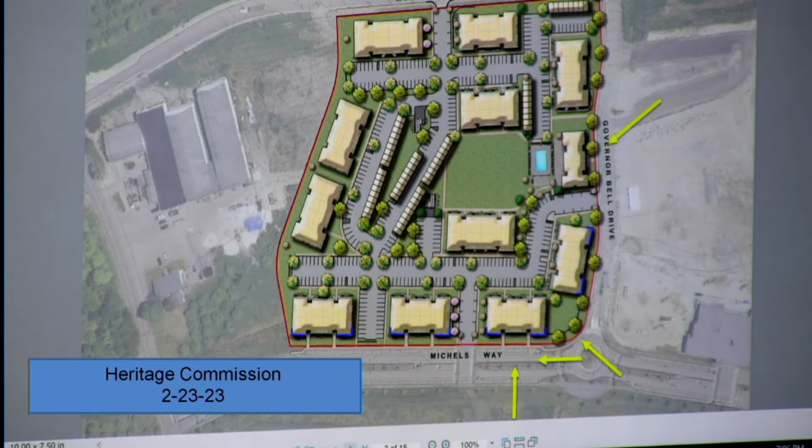So here, just to jog everyone's memory, these were the initial renderings and kind of the massing that we did. We've stuck with the same massing. We've broken it up by providing some color and different materials that we hope you'll enjoy, but just so you can get a glimpse of where we started as we get to where we are today.

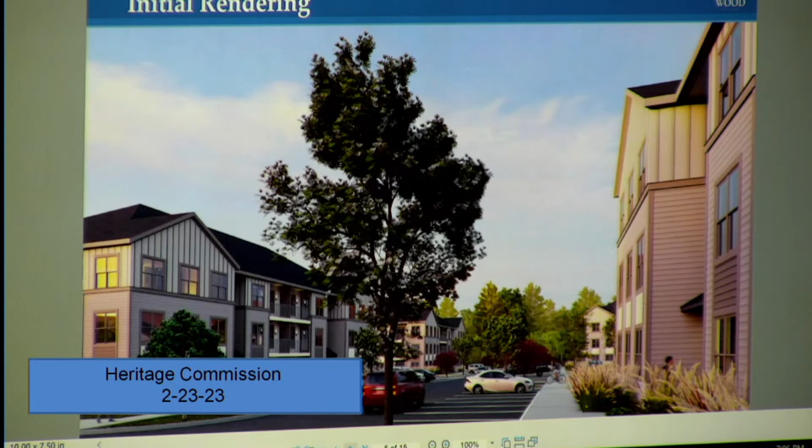I'm going to have Rob, the architect, but one thing I did want to point out is, at the request of the board, previously we did not have connections from the building to Michels Way here. Access was provided on the rear side of the building, on the parking lot side, and we have now added connections to Michels Way. But as was noted, there is a pretty significant grade there, and so stairs are required.

So the scheme you're looking at right now, we did two schemes: one that features stone, which you see here, and one that features brick, which we'll show you in just a second. The most prominent parts of the building are what we chose to clad in the nicer material, the stone.

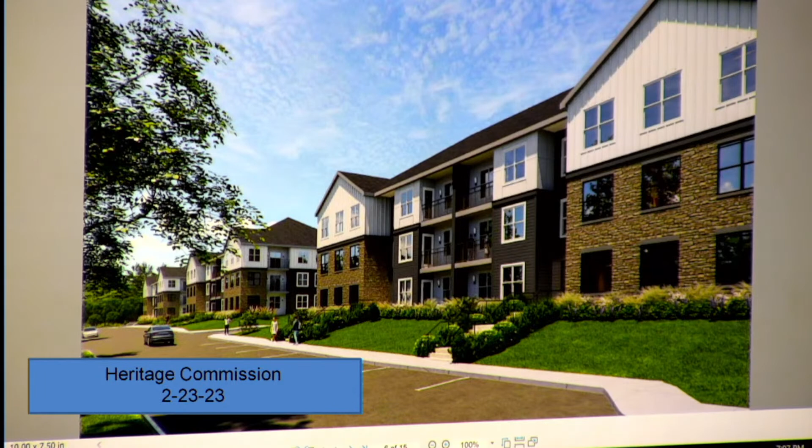Those are what we call the end caps of the building, the far right and far left in this view. Down Michels Way we have 3 buildings, so that's basically 6 of the stone end caps that you see here.

As Mark said, we not only have the staircases, but those staircases lead up to an actual entrance to the building. Before, there were no staircases, no real connection to the public way, and no access point from the exterior to the interior of the buildings - that was common space. Now the steps go up about 6.5 feet, flanked with some landscaping and vegetation, leading directly to entrances to the building.

This view is taken with stone cladding the end caps up to the 3rd floor level, with clapboard and board-and-batten siding in between. Over the lintels of the windows within the stone, we'll have a cast stone concrete lintel as well as a sill below those windows.

Here you can start to see the massiveness and richness of the stone pictured pretty well, returning into the volume of the building. That really goes a long way to make these 3 buildings feel special. You'll see when we look at the site plan how we've actually taken some of that stone and put it on the clubhouse building as well.

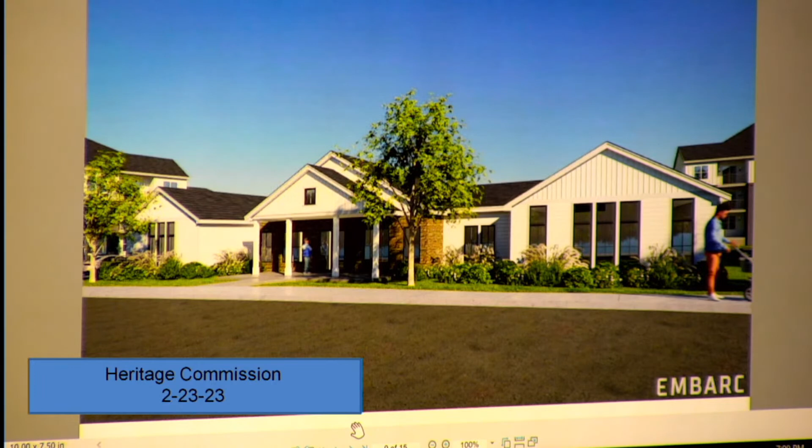Next slide, please. This is the clubhouse building, the other view we talked about. Here we're going to feature the stone or brick surrounding the main entrance, flanking it left and right, or some of the amenity spaces, be they fitness centers, community rooms, or other meeting type spaces.

So those are the studies that we did. We think it made a big difference, not only studying whether it be brick or stone, but also studying the colors of the clapboard, the panel, the fiber cement panels, and so forth. In this view, the building on the right-hand side is another building that would also be clad in brick and/or stone, heading up towards the community building. So it's really 4 buildings that we've chosen to clad - the ones facing the slightly more public side of things.

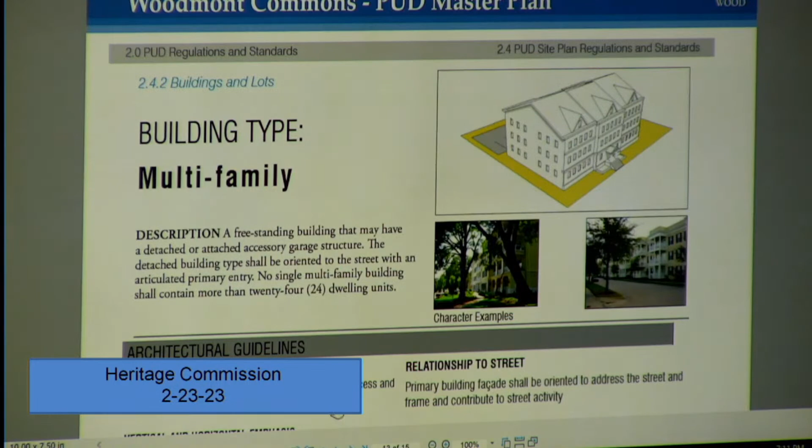So yeah, that's kind of it. We put in a couple slides with the guidelines from both the master plan as well as the Londonderry lookbook. We thought it was prevalent to show these images, and that's where we initially got our design ideas and renderings from the lookbook and the PUD master plan.

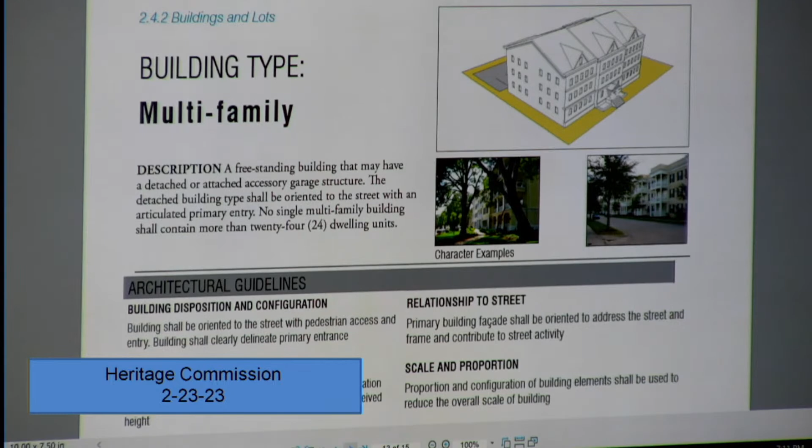So that's kind of the updates we've made. Most of it has been to the materials. The one site change was adding those access ways on Michels Way. We'd love to hear your reactions to the changes we made. We think we've come a long way, and visually now, as you drive down Michels Way and enter the site, whether through Governor Bell or Michels Way, it's something the town can be really proud of and looks really appealing.

Or even the site plan, either one. Stone or brick? We like the stones, probably a stone one, but love to hear the board's thoughts.

I think I personally would tend to agree with you on the stone. With the design, the way the building is, the stone looks a little better to me. But I'll open it up to commissioners to make comments, ask questions. I like the stone also. It seems a little classier. It does seem a little classier, yeah. And it has a little difference from the Dairy Medical Building.

Yeah, and that's kind of what we thought too, right? That's commercial, right? And how can we differentiate residential from commercial in a different block, a different zone, and that's why we kind of thought the stone differentiated its own thing, but yet there is a blending. So look at the brick - the brick just kind of hit me in the eyes, and it's too strong compared to the wooden part, where the stone seems to have more compatibility with the wood.

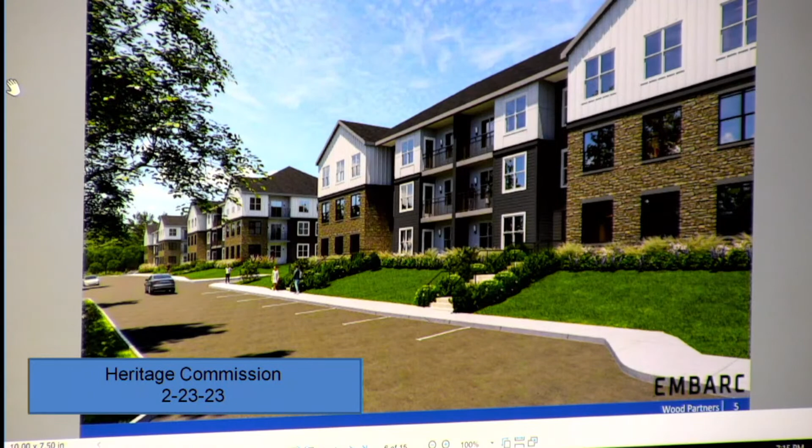Yeah, and upscale. The only thing that I would note, and I'm sure it'll probably come up in the planning board - I could be wrong - is that the faces on Governor Drive, Governor Bell, and Woodmont Ave, those buildings, those faces, I think should carry up and around. The one that's close to the packing center, the packing building, there is no road there. I don't know if there's gonna be a future road there or what transpires with that. But based on what I see here, that would be only my recommendation - face the other ones on Woodmont Ave and Governor Bell.

And I think we've made some really good strides. Yeah, because I think the plans anyway are rough plans for the old storage building, for like a community center or performing arts thing. Who knows? I guess they wanted to keep that building anyway. So of course around there you'd have to probably have parking.

So that would be 4 additional faced buildings. Yeah, that's my recommendation.

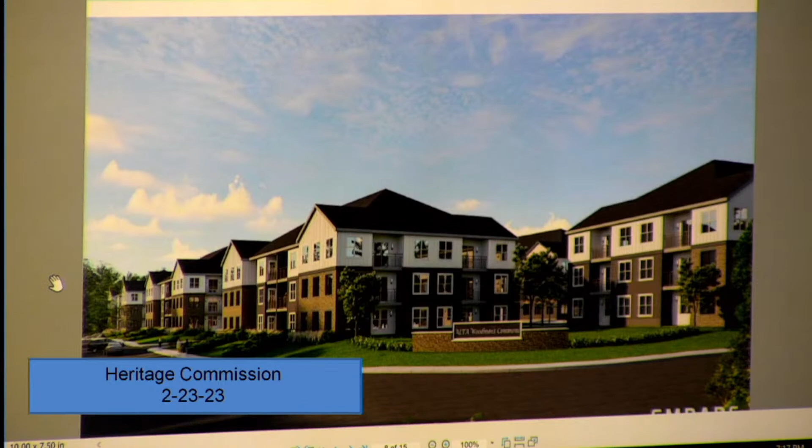Yeah, I would agree. When you look at the master plan here, they have all the parking inside the way we envisioned it. And like I said, if they dress up the other buildings that face Woodmont Ave and Governor Bell, because they're all like a front. Exactly, yeah. 20 years from now, I'm sure it'll be busier than it is now.

My 2 cents here, love the stairs, and thank you for the entranceways on Michael Way. I was gonna ask a question about the facing and the additional buildings, so I think that's been addressed.

I have a note from the minutes about shutters. Did you consider shutters on the exterior of the building? Yeah, we did. You don't typically see them just at the top and seeing them against the brick or stone. You don't typically see that on buildings of this size, and it did look a little bit out of place. We did look at it and it felt it didn't really match the aesthetic. I'll be honest, I like the stone also, and I don't think the shutters will be missed.

I think during our last meeting, we had discussed a signage plan, but I'm not sure if I'm misremembering this. Were you guys not ready to submit the signage yet?

So we did add this monument sign. I see that on here. Are you planning on adding that for the design? Yes. Do you have a signage plan for that sign? We can get you the specs, and that'll be part of the updated submission to the planning board.

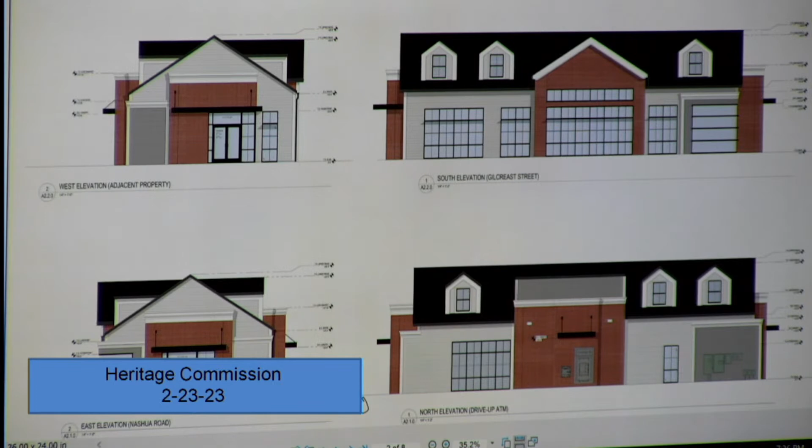If we flip to the next slide, the last comment was just to essentially match the monument sign base brick to the building. That was generally it. We included some other elevations of the building so you can see what it looks like with some of the signage, but that was it. I'll open it up to the commission for any additional comments or feedback.

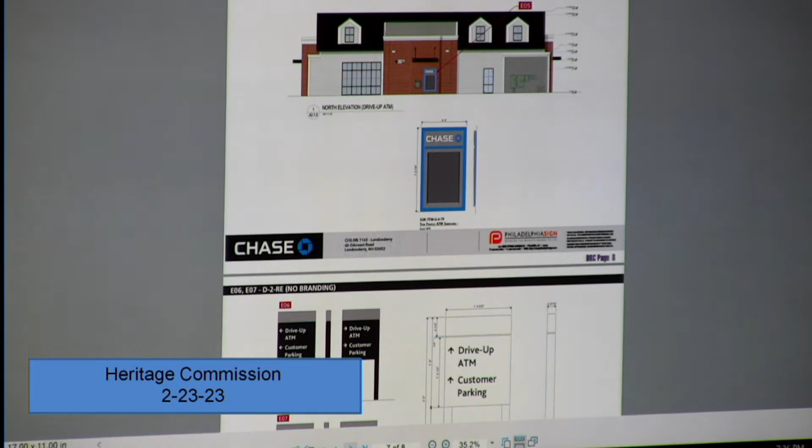Question, Mr. Chairman. Yes. I noticed you've made a note that you're looking at a Belden brick, kind of a velour red, I think it is. Is that a solid red, or does it have a slight variation to it?

I think typically most bricks that—we haven't specified a specific brick on this project yet. So this rendering is for the commission to get an understanding of what the building will look like when it's built.

So you had brought up that maybe we would be using an iron spot, or you mentioned another local brick developed in Massachusetts. There's Stiles and Hart, and then you have Glengarry brick in Maine. Yes, and they're both local. I believe that was it.

So we're just looking at—there would probably most likely be some texture, as all bricks naturally have some texture, except when they're painted. Well, I'm talking about the color. Right, there should be some natural variation within the brick. I feel like it's only totally one color when it's painted, but I may be wrong. There should be some sort of natural variation within the texture.

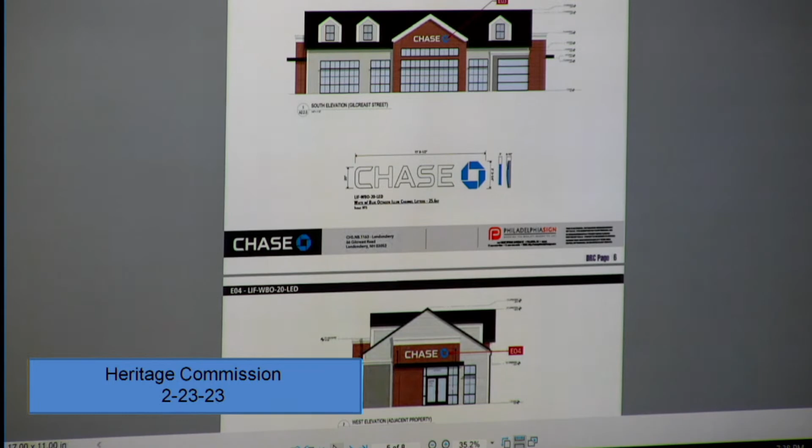When you're talking about painted, are you talking about a clay-based brick, or a Dryvit brick, or EIFS brick? You just kind of caught me off guard with the painted thing. Let me think—I mean, the Belden is a clay-based brick.

What you have on the plans, that's clay-based. We're most likely to select a brick from the manufacturer Endicott. You like Endicott, huh? Yes, that's typically what we're specifying on these Chase Banks, and I think in previous Chase Banks we've kind of had a relationship with that brand.

And then we'll be using a thin brick, not a full-size brick. More like a veneer type of thing? Yeah, as far as whether it be fired clay or what have you, we'll probably go with whichever one makes the most sense financially, as well as which has the color we're looking for. That's kind of our primary driver.

Well, if you like Endicott, that's a clay-based brick—it's not an EIFS or anything like that. To try to get some color into it, maybe you want to look at the medium iron spot or the Kendall Square blend. We love recommendations from the board, so we will look at iron spot brick. Absolutely, thank you.

Could I make a suggestion, Mr. Chairman? Once you fellows have looked at it and narrowed down your choices—because it sounds like you're still thinking about it—I think we've asked for samples in the past. Maybe we'd like to get a sample of what you want, and then we'll make a specific recommendation based on the samples you sent. Yeah, agreed, especially since, as you just stated, you haven't actually chosen your brick yet. So without a statement saying that's the brick you're gonna use, I would love to just see a sample before we approve. Absolutely, we can do the same as our last submittal.

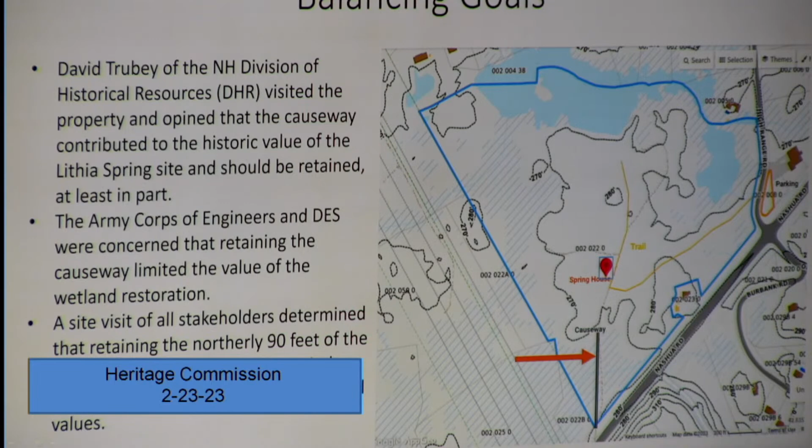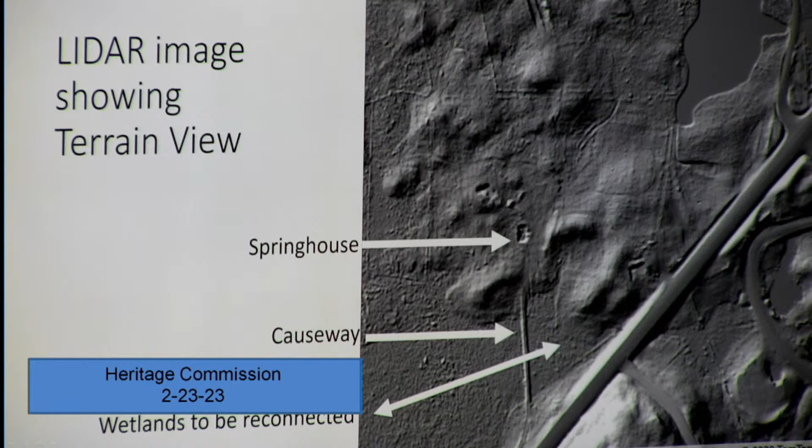So how will they do the restoration of the wetland? Well, the restoration should take place through nature, we shouldn't have to really do anything. We're actually not gonna touch the wetlands, so all we're doing is taking material out that's lying between the two wetlands, and it'll gradually fill in, kind of erode together, so to speak, with water moving back and forth.

So no huge earth-moving equipment? No, there'll be a small piece of equipment that will come in from 102 and start at the end of that arrow, then just work its way backward, picking up the material. The material will be spread out along the upland along 102 in clumps, and then it'll just naturalize.

It's very good that we at least have Lithia Spring from a historical point of view, which I've heard a lot about, but also for the wetland and maintaining wetland and water flow and species migration and everything. Sounds like a sound plan to me.

It'll also, with people visiting there too, I think having the causeway jut out into the wetlands is going to create a really nice little viewing area, where you can look around the wetlands and it'll be quiet, minus the traffic going by on 102. But you'll be able to take a look and see the wildlife around, and it'll be a great little spot for the town too.